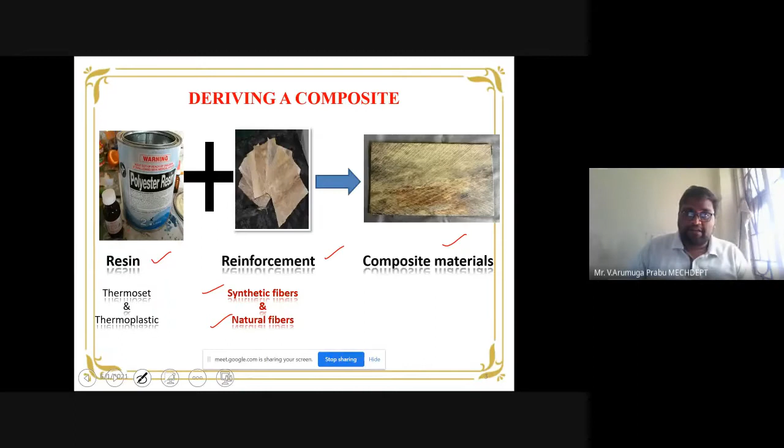So when we combine these two together, the output is your composite material, which should be in a plate form or whatever product form, according to the mold we are going to use and according to the application where we need it. So this is a brief introduction about how we derive composites.

Followed by that, the next one I would like to discuss with you is about hybrid composites. Why do we go for hybrid composites? We all know composite is one or more, in the sense matrix and reinforcement. Now as technology changes, as the day progresses, and as more research is evolving, the usage of hybrid composites comes into picture.

What are hybrid composites? Here you are going to use two or more reinforcements. Instead of one reinforcement and one matrix, we go for using two reinforcements. On the other hand, two matrices is not at all possible - there is not enough research because of its chemical properties. Two matrices is a difficult task.

But on the other hand, our research team focuses on mixing fillers with the matrix in such a way that we are able to produce hybrid composites. The reason is: one matrix is there, one filler is there, and another one is the reinforcement. So this is about your hybrid composites.

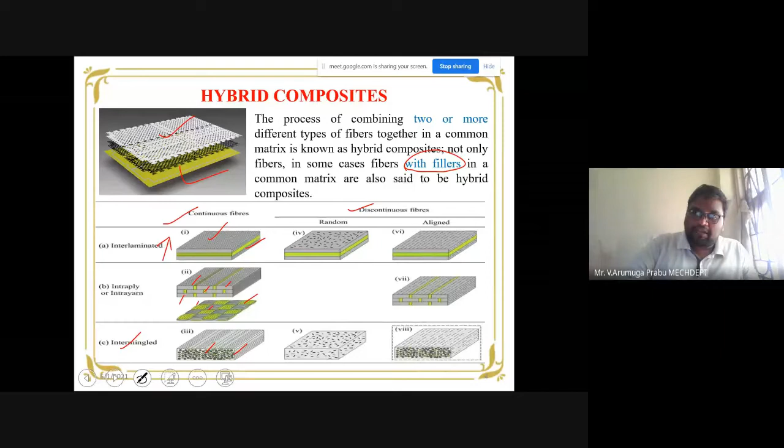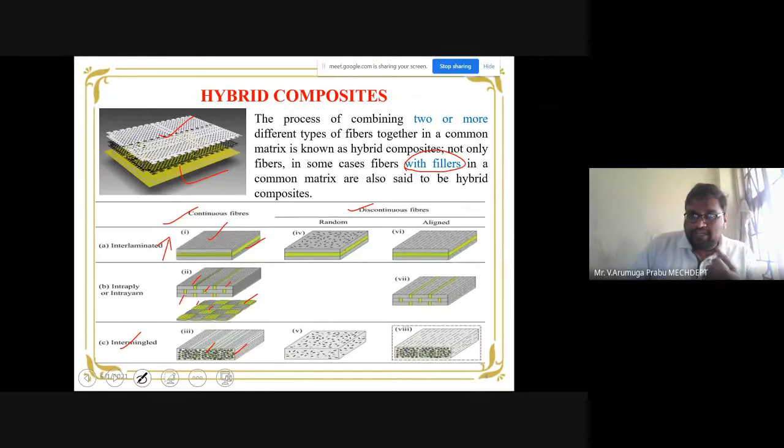In such a manner, the discontinuous fibers are arranged either in a random way or aligned way as shown in the pictures. So this is a brief introduction about hybrid composites, how we can prepare them in different arrangements, clearly shown in the pictures.

Now, why do we need hybrid composites? Of course this question will arise in all our minds. Automatically composites will reach the peak, and more sectors are using composites. Why specifically do we go for composites, and why do we go for fillers? It gives the answers for that too - why we go for using fillers for making some advanced, interesting composites.

The first reason is a general thing, that is the cost factor. High material cost is there. We go for merging one or more fiber, or fiber with filler, or matrix with filler. This automatically gives excellent output properties, enhancement in properties. So if you use filler as a material which is available by nature itself, there is no cost involved. Instead of spending a high material cost, with a very, very low cost, we are able to produce some good, interesting, advanced composites.

That's the first reason. The second reason is the low installation cost. There is no special setup you need to introduce for making your hybrid composites. So the installation is zero ultimately. That's another advantage where we go for the hybrid composite.

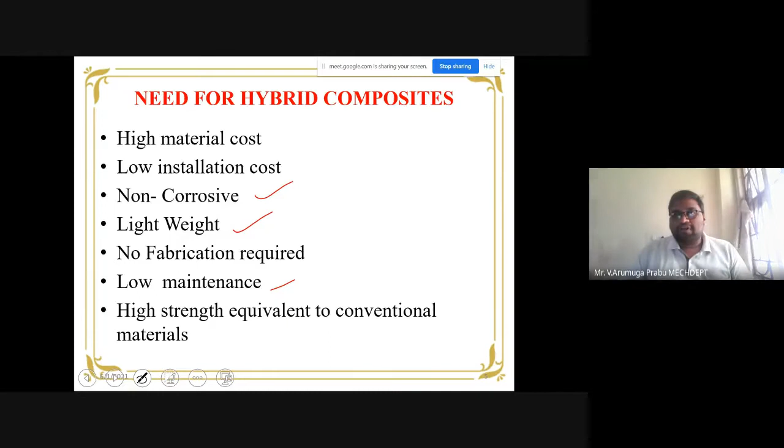And the ultimate highlighting point based on which we go for the hybrid composite is the high strength equivalent to our existing conventional materials. So these are all the major reasons based on which we go for the usage of hybrid composites.

Let me move on to the discussion about a few examples. In my next two slides, I'm going to show you a few interesting examples about the different reinforcement materials we are using and the different matrix materials we are using.

This photograph shows some interesting natural fibers as well as synthetic fiber used for developing advanced composites. The first one is the coconut tree - from the coconut tree, this is the coconut sheath that started from it. Then this one is the sisal fiber, purely a natural resource which is grown by itself. Nowadays homes also keep the sisal plant as a decorative one. The fiber extracted from the sisal plant is like this, just like our hair, with a pale brownish color.

Then this is one example of synthetic fiber, your glass fiber, which is in the mat form, and you can cut the mat and utilize it according to your need. So these are all a few examples of natural fibers and synthetic fibers which we are using effectively for producing advanced composites.

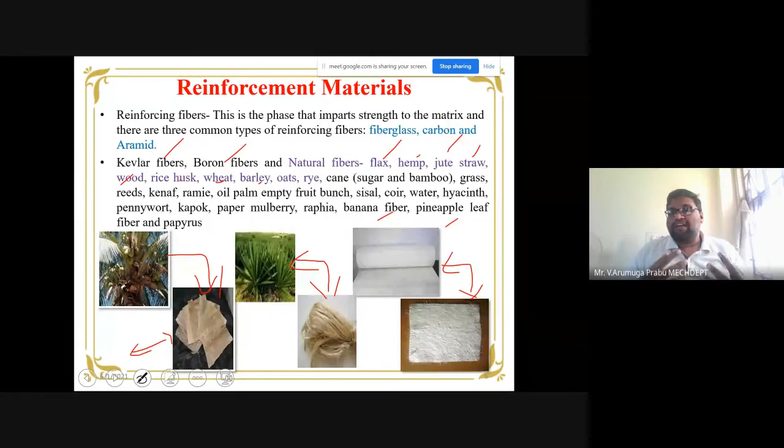Metal matrix is now being used exclusively for producing products related to aerospace sectors, where reinforcement and the matrix are both metal. But recently, they have started research studies on reinforcing natural fiber with metal. That research is recent, and some exhaustive research will be needed in the coming days.

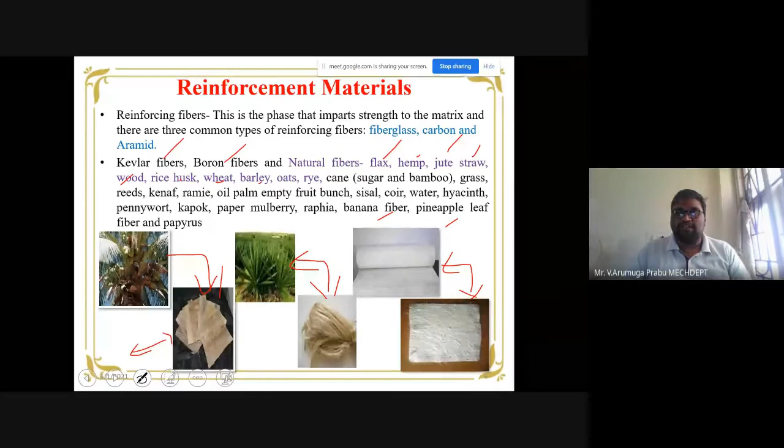So this is about the various reinforcement and matrix materials we use in manufacturing advanced composites. Now, the next thing I am going to focus on is the major fillers we use to produce our advanced composite materials.

These four are the major industrial wastes collected, which are ball milled, and the fine powder form is shown in the pictures. These four are the very commonly generated industrial wastes, more in number. Our team members did some extensive study on using these industrial wastes as fillers.

This rice husk is the waste produced during the processing of rice. And the fly ash, of course, you are all aware about. In all industries, while burning, fly ash is generated in larger number.

Then the third one is the red mud. This is an interesting waste. Myself and my professor Udaykumar completed one sponsored project based on this red mud utilization only. What is this red mud? It is an exclusive waste generated during the production of aluminium, coming out from the aluminium industry.

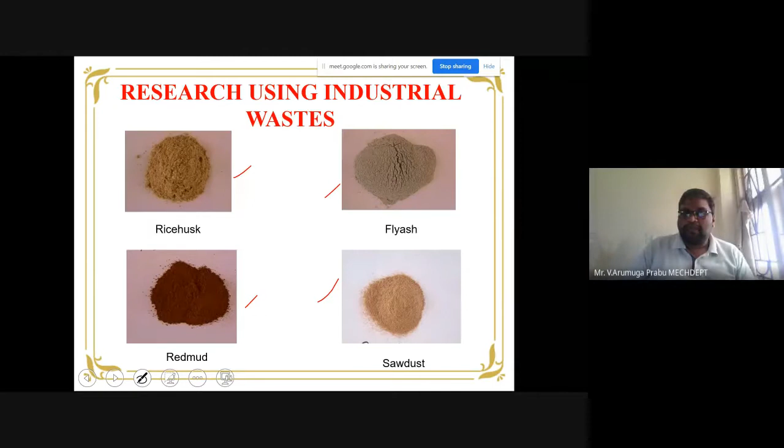So this waste we are using as a filler, that is, we are going to recycle it, and from this we are producing some innovative composites with excellent properties. Then finally sawdust, another waste generated during the processing of wood for making doors, windows, and other panels. So these four major wastes we take as filler, and some interesting results they produce during composite manufacturing, which I would like to discuss in my coming slides.

First, how we prepare the composite: we just take the polymer matrix, because this type of filler has the capability to bind only with the polymer matrix, not with metal or ceramic. You can try, because without trying we can't say anything. You can try in such a manner that your metal or ceramic should be in powder form, as shown in my previous slide, all in fine powder form. You have to collectively mix it together and go for some advanced powder metallurgy technology, which I am not familiar with. If you are familiar in that area, you can try that also.

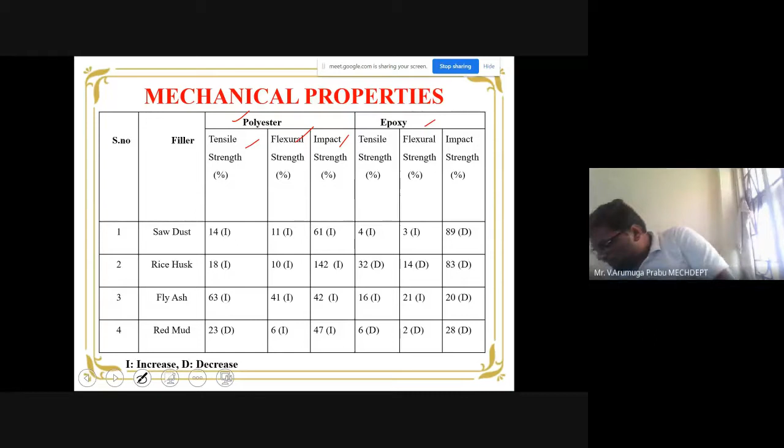As mechanical engineering background people, we carry out mechanical property studies, mainly tensile strength, flexural strength, and impact strength. We take two polymer families to see how these fillers are behaving. Both belong to the polymer family. In that polymer family, two types we have considered: one is polyester, another is epoxies.

So now here, the interesting results that we obtain is tabulated here. The I indicates the increase, and all the values are in terms of percentage, the increase and the decrease in strength.

Now, note that in the case of sawdust waste, both polyester and epoxy show a considerable increase in all the strength except one particular case. In all other cases, 14% increase, 11% increase, 61% increase. In the case of polyester, all show the increasing trend. If you see overall, collectively all four wastes, you are able to notice only increases. In this particular case, only decrease.

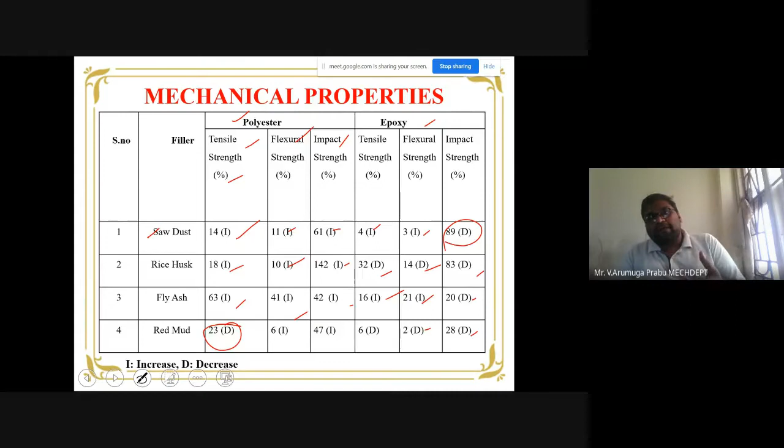Probably they don't have enough capability to withstand the pulling force. On the other hand, in epoxy also, most cases show increase, but decrease will be high. So this waste is not at all compatible with epoxy, because we notice a drastic decrease in the mechanical properties, exclusively tensile, flexural, and impact property. So when compared to polyester, epoxy is not well compatible with the industrial waste fillers.

On the other hand, polyester poses increase in all the strength. In fly ash, rice husk, and sawdust, all three show increase in weight percentage in all three cases, that is tensile, flexural, as well as impact. Only in the case of red mud, we noticed a decrease.

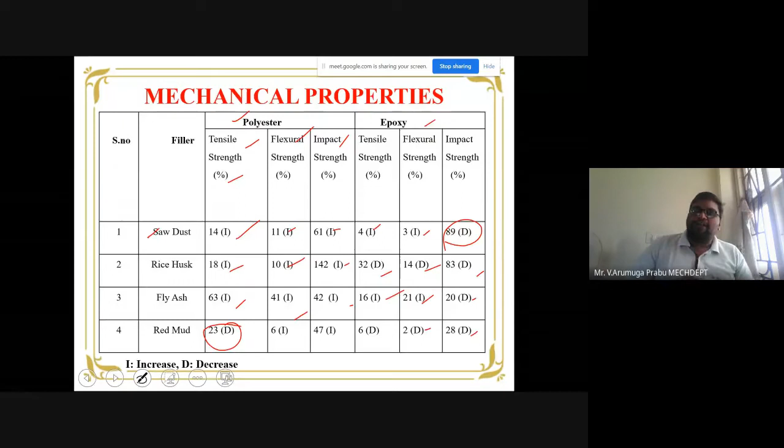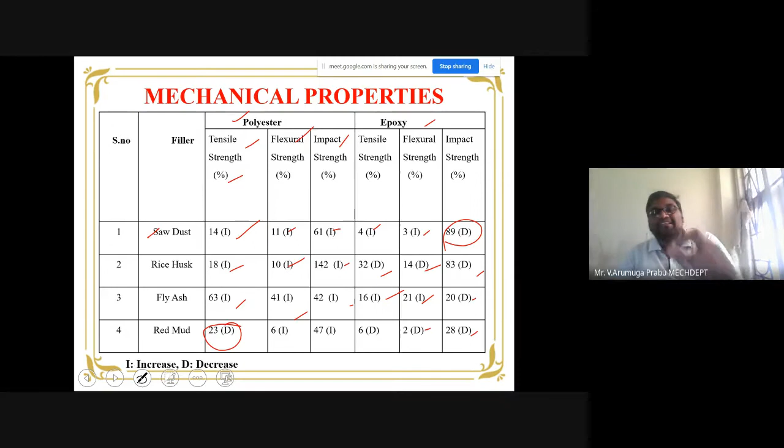That also we noticed in red mud, the non-uniform distribution of these fillers will produce a decrease in the tensile strength, because the fillers accumulate at one particular place. Here your filler is the reinforcement. During my earlier slide presentation, I pointed out that the reinforcement's main purpose is to give additional strength to your matrix. So if the filler occupies one particular position, your matrix simply remains in one area.

So now your matrix does not get strengthened. That thing happens because of the non-uniform distribution, which results in the decrease we noticed in that particular case. Other than that, we are able to notice an interesting increase in the strength.

So now these results I am showing are purely for your filler and matrix, that is, the filler is the reinforcement and the matrix is your polyester and epoxy matrix.

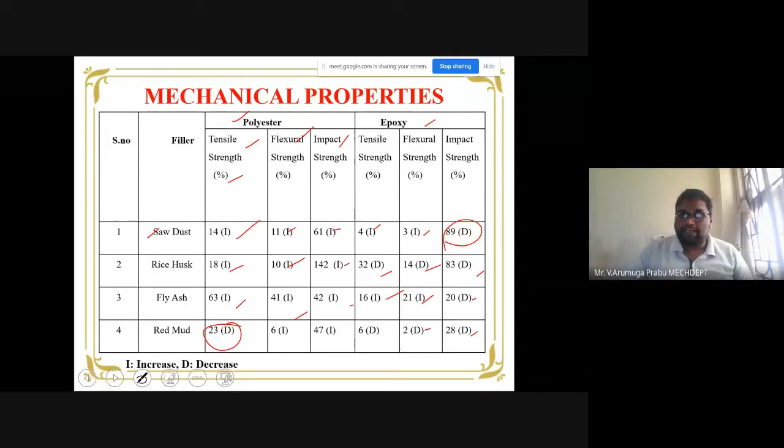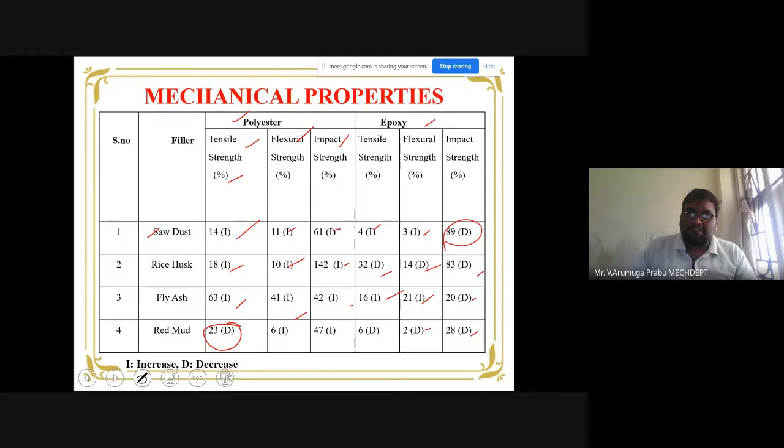Now with this, let me move on to the discussion about the case studies. A few examples I am going to take, showing how the advanced composites are manufactured and how they behave with respect to the usage of fillers, especially the industrial waste fillers. So let me show you case study 1, about the hybrid composites prepared purely using natural fibers.

The results I am showing in my case study are for the combination of two natural fibers. This is natural fiber 1, Palmyra waste. The next natural fiber is coir. So now this Palmyra waste and coir are going to be combined together and reinforced with unsaturated polyester resin in such a way that the hybrid composite is produced.

So here also we note some interesting change in the mechanical property, that is in the tensile strength, flexural strength, and the impact strength. This two waste combination, and another main thing we have to notice when preparing the advanced composite is the composite weight percentage, not the composites, the reinforcement and the matrix. The reinforcement-matrix weight percentage and the reinforcement length, all those things we have to consider.

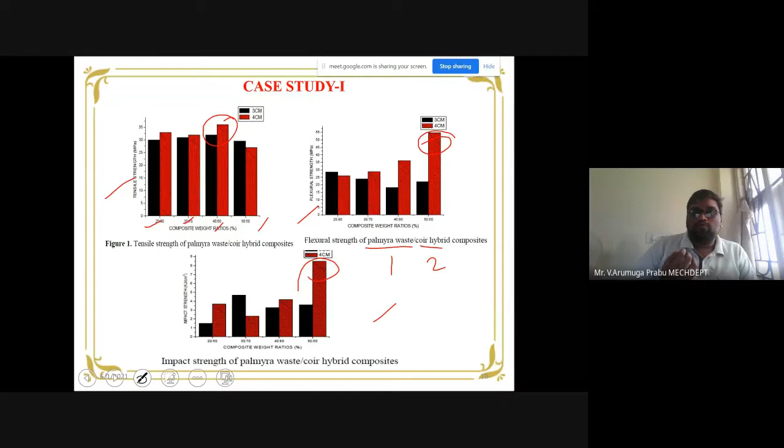Okay, so flexural and impact at 50:50 weight percentage shows enhancement in results. On the other hand, for tensile strength, 50:50 comes last; only 40:60 has the highest value. This may be due to the incorporation of Palmyra waste and coir in such a way that we are not able to obtain the final product in a properly uniform manner, affecting strength. So this is one case study.

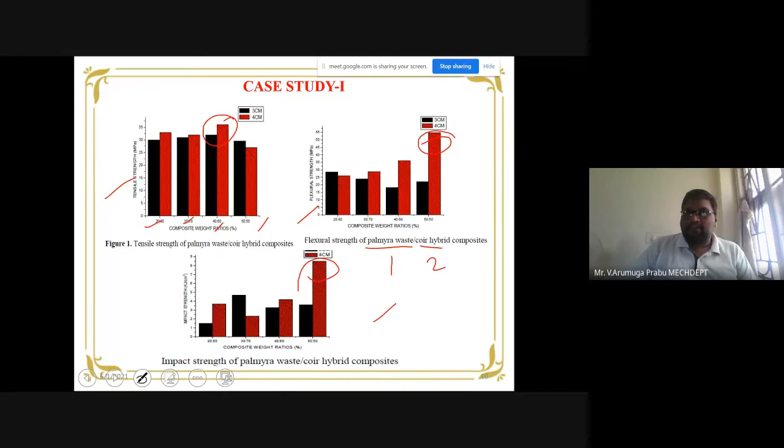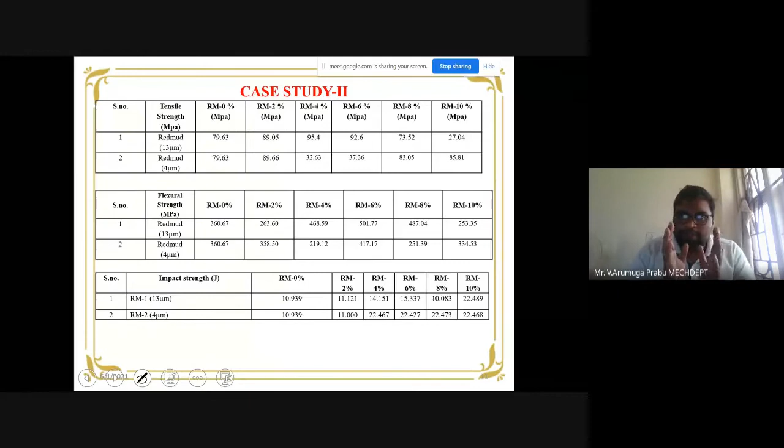And this is the next case study. What we did here is add a filler along with the fiber and matrix, so case 2 is another type of hybrid composite we prepared. My case 1 was purely the preparation of hybrid composites based on two natural fibers.

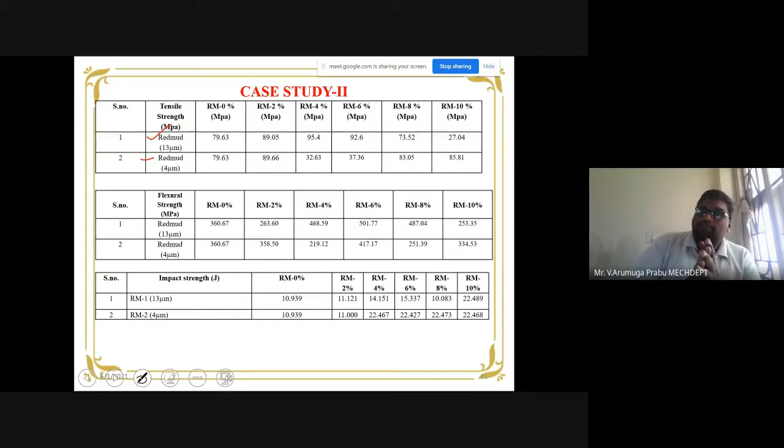Here in case study 2, I discuss the behavior of hybrid composites prepared using fiber, then filler. The filler is the industrial waste red mud, as mentioned in the table. Followed by that, the matrix is unsaturated polyester. Here we vary the weight percentage of the industrial waste red mud filler from 2 to 10 only.

Why is such a low weight percentage selected? The reason is that during our initial studies and iterations, we noticed that higher addition of weight percentage decreases the strength. So we turned our research focus towards developing advanced composites using a low red mud weight percentage that varies from 2 to 10.

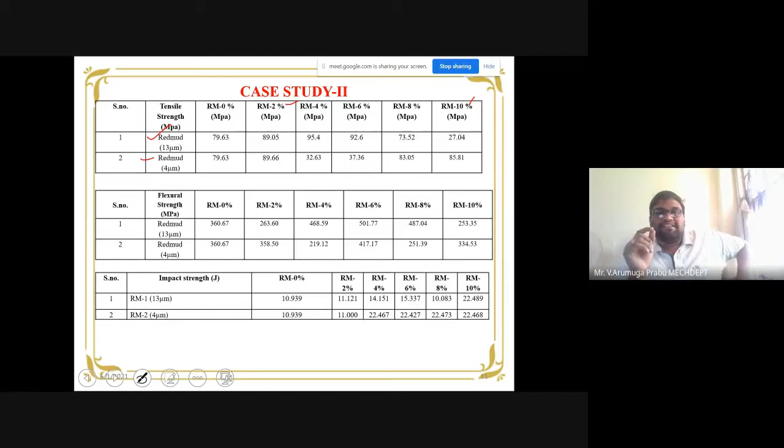That is the reason why nowadays nanocomposites are creating a huge impact, because the particle size is in nanometers or microns, giving better surface dispersion. If surface dispersion is greater, we automatically obtain finer results. This is evident from many researchers' work, and because of this reason, we chose this small particle size range that I'd like to highlight here.

Notice the strength values. This is the case without filler, where the percentage is 0, and the strength is 79.63. If you look at the other cases, an increase in strength is noted, except for red mud 8 and 10. So an increase in weight percentage beyond a point decreases the strength, which is why we chose the range between 2 and 10.

Among the combinations, the 4% weight percentage gives better results for the red mud particle size of 13 microns. So varying the filler particle size also creates a huge impact on strength. At a 4-micron particle size, it gives the highest strength of 89, for the 2% case only. For the remaining percentages, strength decreases, then slightly increases again for 8 and 10%.

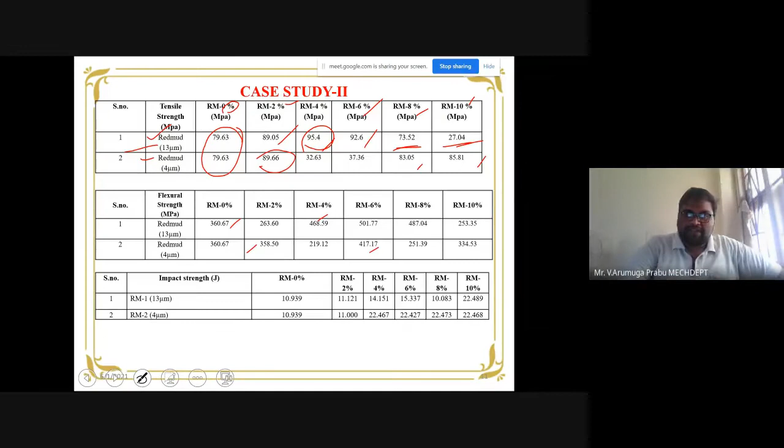The reason may be due to the dispersion behavior of the red mud. The flexural strength also behaves in a similar manner, and the impact strength results are also shown in the table. From these results, I would like to conclude and insist strongly that the addition of red mud filler along with the natural fiber and polyester resin increases the mechanical properties — that is, an increase in tensile strength, flexural strength and impact strength.

Just to illustrate this, I'll take one example and change the color to green. Now please note the green color marking. In this case, 92 is the highest among all; in the next case, 501.77 is the highest; in this case, nearly 22 is the highest. You can take any case — this is almost always the highest one.

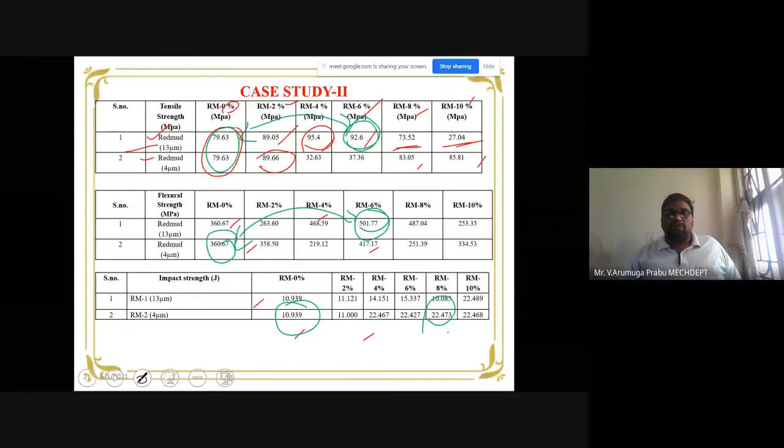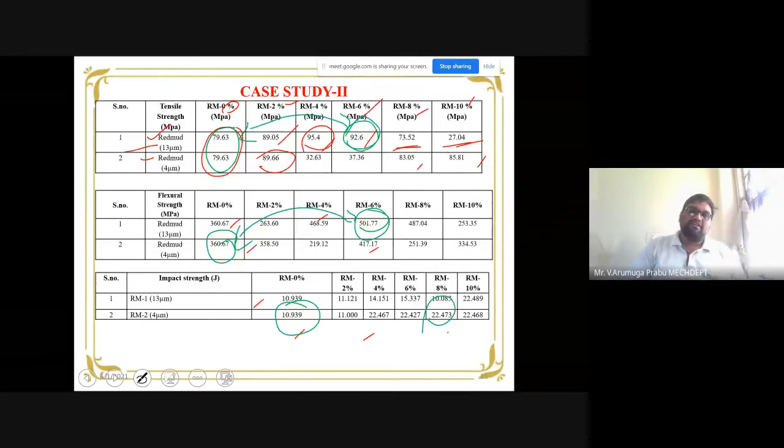If you compare to the 0% case across all instances, you'll see a much better improvement in strength. The 0% case represents only the fiber and matrix combination results. On the other hand, when we include the filler as a secondary reinforcement to produce hybrid composites, enhancement of strength is noticed in all cases — tensile, flexural, and impact properties.

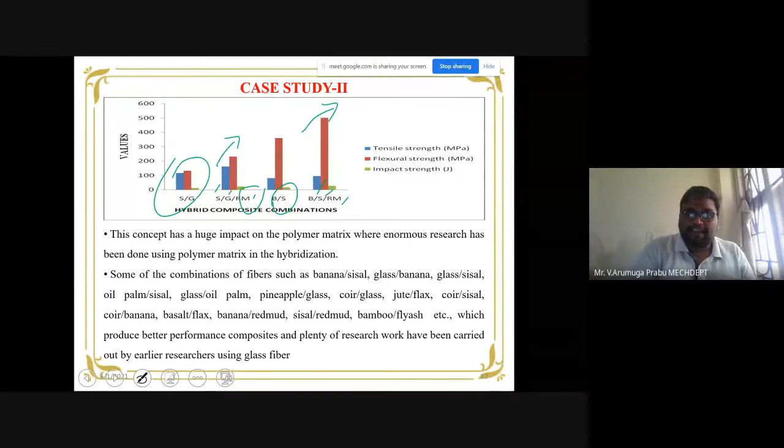Now you notice the peak. Please notice this color. These three colors will go in an increasing trend in case of addition of filler. So in all cases, interestingly, the increase in mechanical property values is clearly identified.

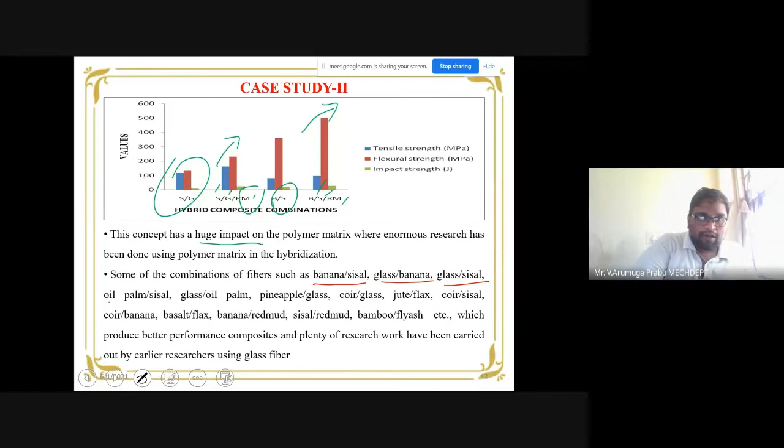This concept is going to produce a huge impact in the case of polymer matrix, where enormous, exhaustive research is done using polymer matrix in hybridizations. You can select any combination, as mentioned in the slide: banana-sisal, glass-sisal, glass-banana, oil palm-sisal. These are some interesting combinations: pineapple-glass, coir-glass, jute-flax, sisal-red mud, bamboo-fly ash. Likewise, all these hybrid composites are produced, which give better performance composites, and a lot of work has already been reported by many researchers, especially for the hybrid concept using glass fiber, that I would like to highlight.

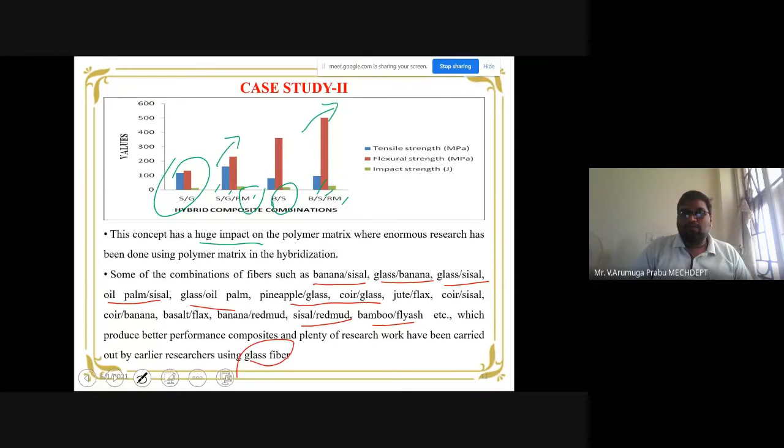With this, I am concluding the first part of my presentation, and as I pointed out in the beginning slide, let me move on to the discussion about the last half. The second half of my presentation is about another interesting type of filler, that is biochar.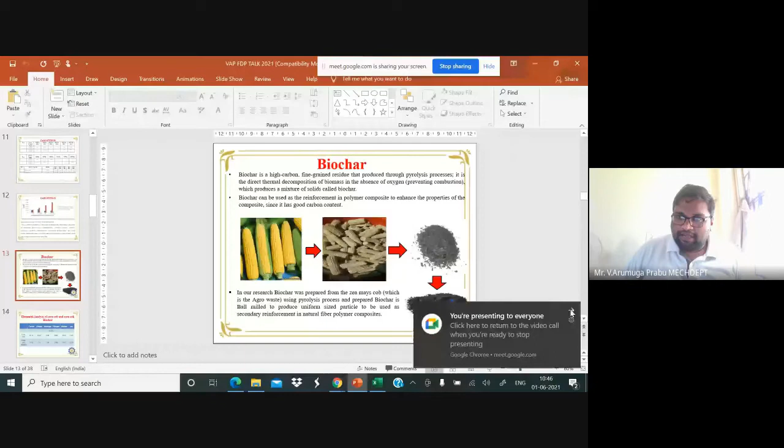Okay, let me continue my second half of the talk. Later on we will have the discussion. I will take another 20 to 25 minutes for the discussion of my second half, followed by that we have...

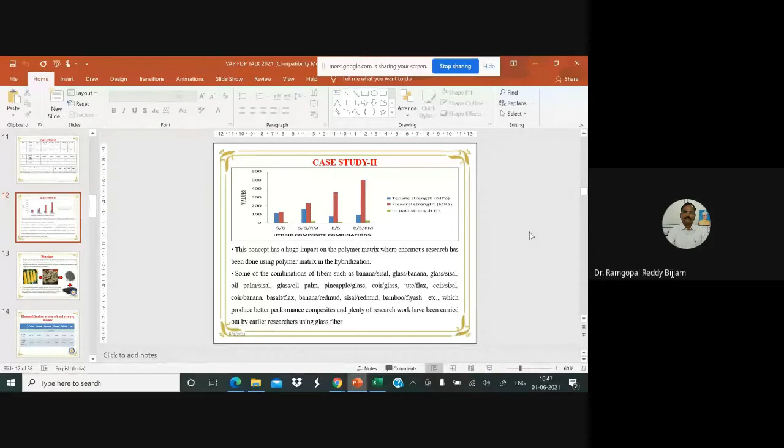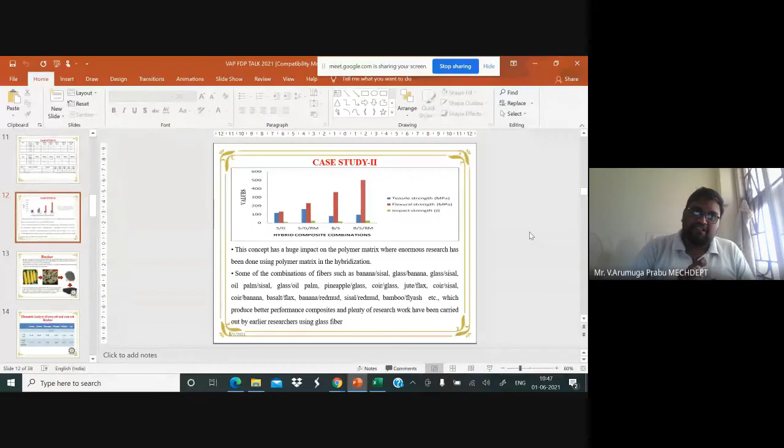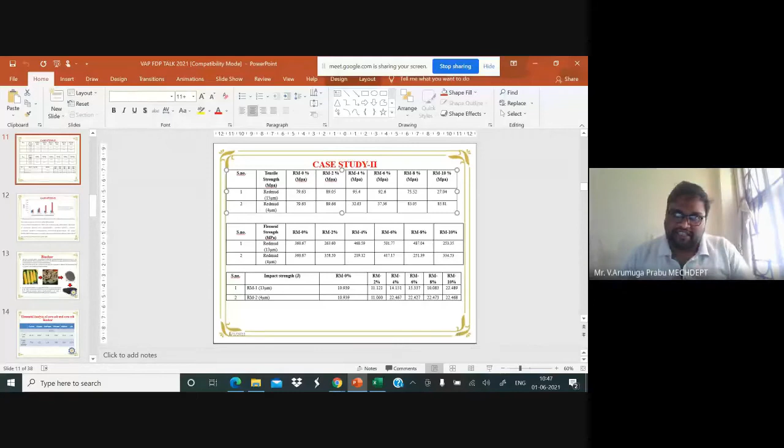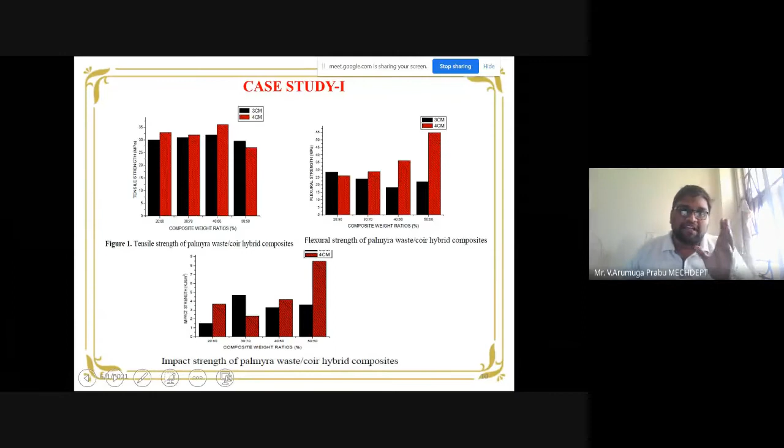Yes sir, when you are taking different combinations, jute, sisal, and so on, what is the volume fraction of each fiber you are taking? Is any one constant, or are you taking different volume fractions for all these combinations? If you are varying two fibers in hybrid reinforcement simultaneously, which one affects the strength, and due to which fiber are you getting more strength? How can you say?

Yeah sir, that's another good point. I would like to insist here that for the main reason, initially we take, for example, sisal as 30%, then banana fiber as the remaining 70%, a 30:70 ratio. In that 30:70, we study the mechanical properties for this combination. We keep this 30:70 fixed, and then we add the filler reinforcement along with that. So we have comparison values based on pure sisal and pure banana results. Based on these results only, we are able to compare. Apart from that, as you pointed out, we are not able to identify, if we vary that combination, which one is exclusively affecting the properties.

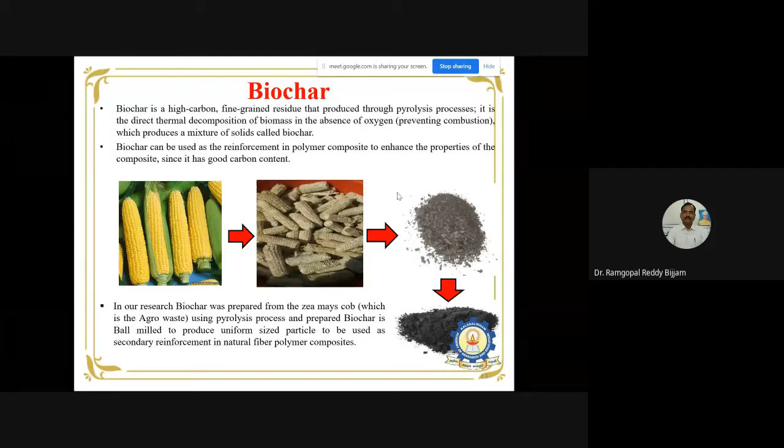Sir, one more doubt. When you are using red mud, what happens is the tensile strength increases up to about 4-6%, but if you increase it further, the tensile strength decreases. Why does this happen? Is there any reason for this decrease?

Yes sir, the main reason relates to the manufacturing technique we followed, which is the solution dispersion method for preparing the red mud-based polymer composite. In this technique, similar to the hand layup method, I pour my polymer—either polyester or epoxy—into a glass mold, add the red mud in powder form into the matrix, and perform manual stirring.

So the reason is due to these manufacturing techniques. Because of manual stirring, proper distribution of red mud is not achieved, and also since I am manually pouring into the glass mold, the red mud tends to accumulate in particular places and occupy the corners. This is one of the major reasons we identified for the variation in strength.

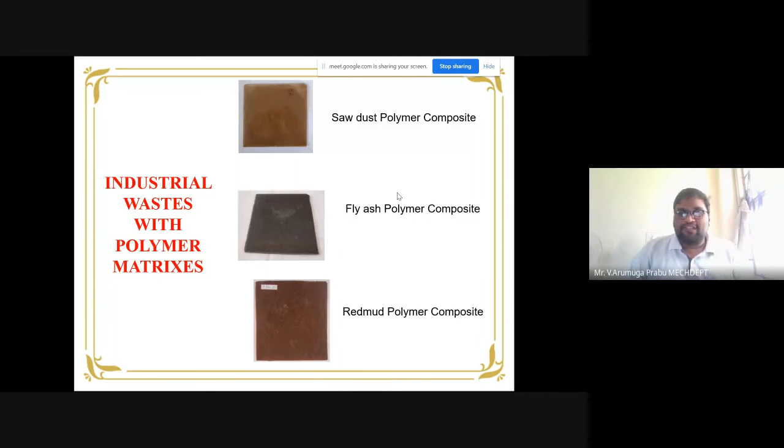This one is about biochar, an interesting type of filler we have been working on more recently—for the past 2 to 3 years, my research team has been doing research in this area. What is biochar? It is also prepared from waste, obtained when waste is subjected to the pyrolysis process. During pyrolysis, thermal decomposition of biomass occurs in the absence of oxygen.

You put the waste inside a container, and the waste is subjected to burning in such a way that absence of oxygen is ensured. The biochar produced has an excellent capability—it has good carbon content, and this presence of carbon enhances the properties of composites drastically, especially along with polymer matrices.

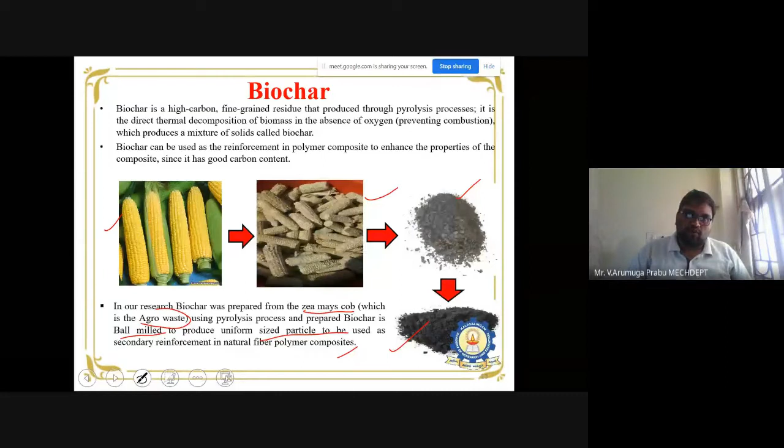This biochar is ball milled to produce uniform sized particles, which will again be used as a filler, as a secondary reinforcement along with natural fiber for producing the advanced composite. So quickly I will go through my slide.

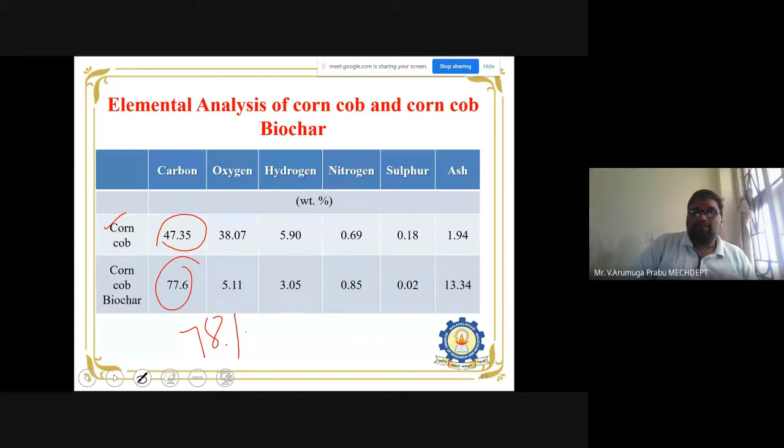This is the elemental analysis showing the composition present in the biochar. The ordinary waste corn cob has a carbon percentage of 47, whereas the biochar obtained from these corn cobs by means of the pyrolysis process has a very high carbon content of nearly 78%, which makes this corn cob biochar an effective reinforcement for advanced composites, because carbon is one of the highest strength elements. High carbon content surely produces the highest strength.

So this is how we are producing the biochar. The source is corn waste, and the pyrolysis temperature normally varies from 500 to 700, though you can also take 300, depending on your waste material. This 700 is suitable for corn cob, but in some cases 700 will not produce biochar, so depending on the material, the temperature will vary from 300 to 700.

The duration of burning is normally 3 hours in a closed confined environment with complete absence of oxygen. After the content is obtained, it is subjected to ball milling, normally in the ratio of 1:15, to obtain a smooth fine powder form. The ball mill speed and duration also vary depending on your material.

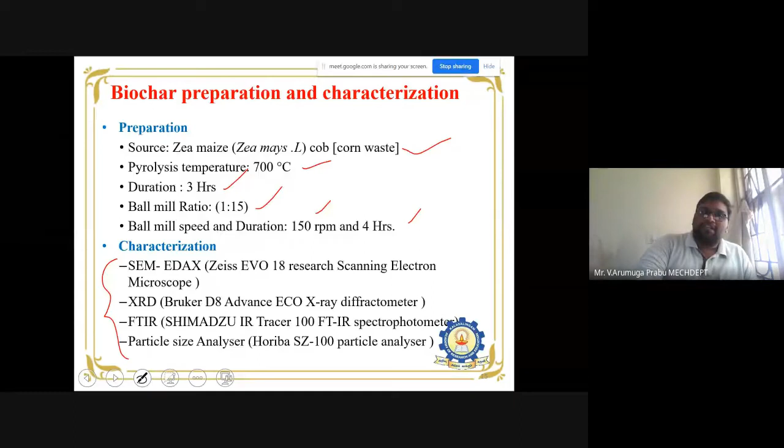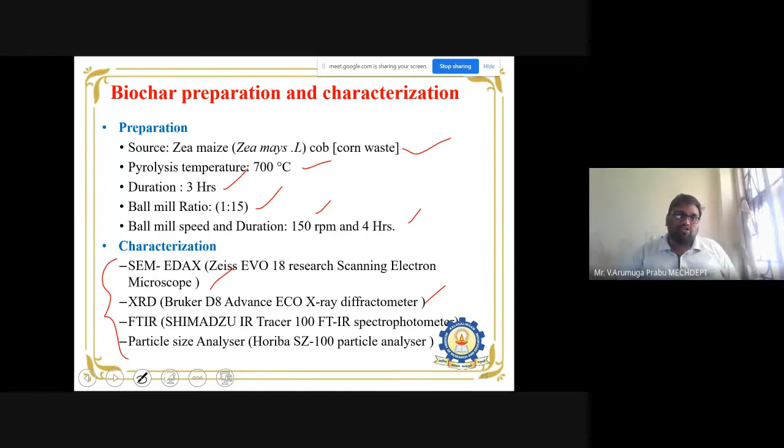After the biochar is prepared, it is subjected to various characterization studies to understand the composition elements present in it. For that, you can go for SEM, EDAX, XRD, FTIR studies, as well as particle size analyzer to know how much size your biochar is. All these things you are able to understand by means of this characterization study.

So this diagram shows how we are preparing, extracting the biochar. The first one is the matrix, which is as usual the polyester matrix. Then the reinforcement is your biochar - see here, this black one is none other than your biochar. And this is your solution dispersion method, which was pointed out a few minutes back.

This is a glass mold, covered on all sides except the top. Through the top opening, the mixing of matrix and reinforcement is poured over the glass mold, and the glass mold is left for curing. The final specimen obtained is in a rectangular or square form depending on the size of the glass mold.

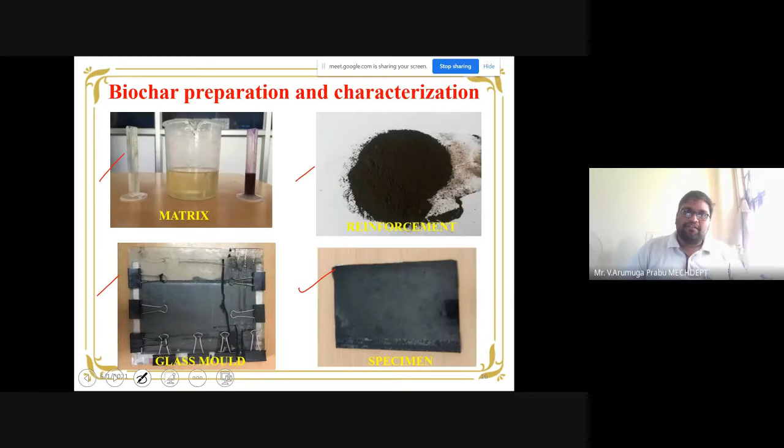Then for further studies, you have to cut this specimen as per the ASTM standard to carry out the various mechanical performance studies, as well as physical property and chemical property studies. See, composite is a very vast field, a very vast interdisciplinary approach, so you are able to use it in an effective manner.

And these are all the results which we obtain by the usage of biochar. So here, instead of polyester as shown in the previous diagram, the results we did using another interesting type of polymer, the pure vinyl ester resin, as the matrix, and here biochar is used. Note the difference here - this is pure vinyl ester.

Pure V is the pure vinyl ester resin. So when compared to pure vinyl ester, the addition of biochar produces an enhancement in results at the 6 weight percentage. All other remaining weight percentages show a decrease in strength. If you notice the 6 weight percentage in all cases, the enhancement in strength is noticed. So among all the combinations, the 6 weight percentage biochar possesses excellent mechanical properties when compared with pure vinyl ester.

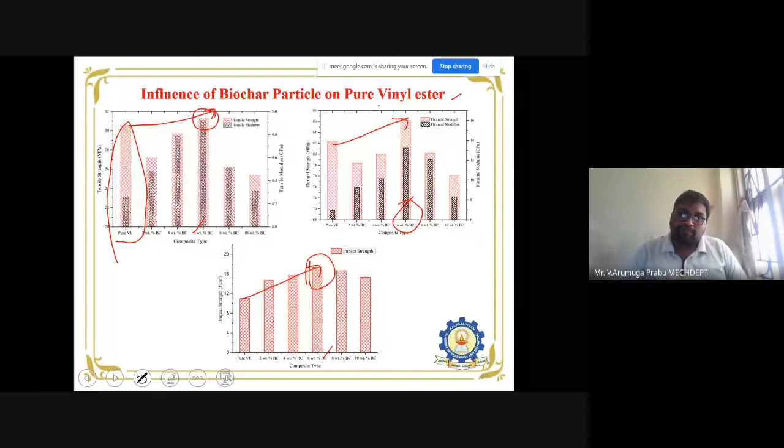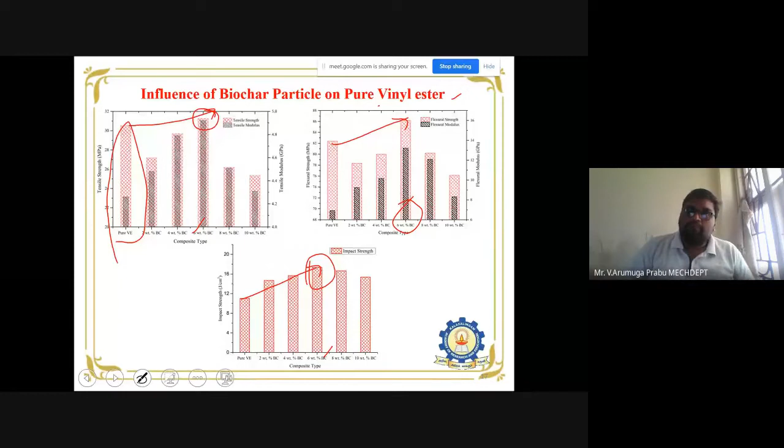So this is the proper example for a composite. You must ensure that when matrix and reinforcement combine together, it produces increasing strength at one point - then only it's said to be a composite, producing some improvement in results. When combining these two together always produces a decrease in strength, there's no use saying that one is an effective composite.

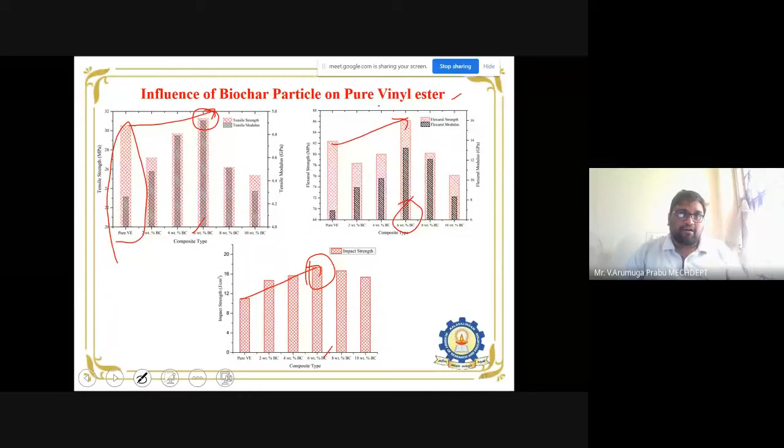So these are all the results. Then followed by this, we obtained interesting results using vinyl ester and biochar alone. Now we go for mixing the biochar along with - to see how it's going to behave with the natural fiber.

So here the natural fiber we have chosen is the Sansevieria cylindrica fiber, and some of the special properties of this natural fiber are mentioned here. It has a high strength to weight ratio, high creep resistant capability, high tensile strength, and very good toughness. It has very high wear resistance, higher than metals, and good corrosion resistance. It's not affected by temperature change, because most natural fibers are subjected to deformation due to temperature change, but that's not the case with Sansevieria cylindrica. So this is the comparison of how Sansevieria cylindrica possesses good properties, and how its composition compares well with other natural fibers like sisal.

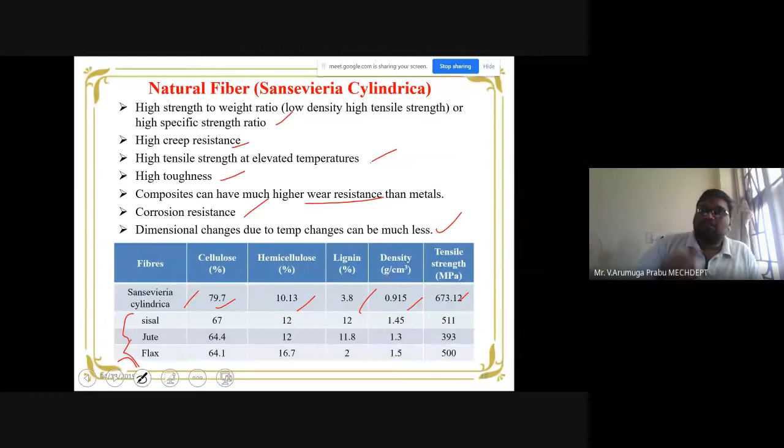Sansevieria cylindrica is also used as a decorative plant. Now I will quickly go through this to clarify what composition is present.

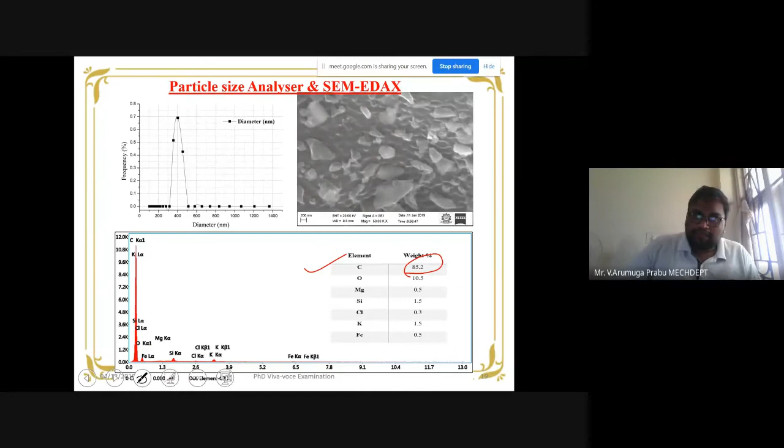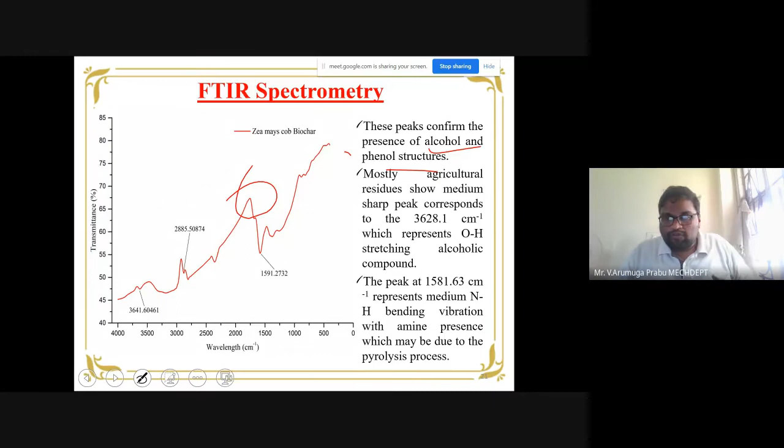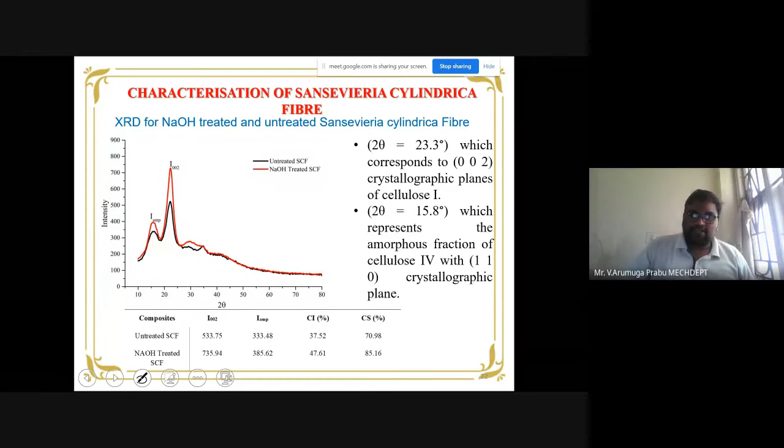This is the characterization done for the Sansevieria cylindrica, and we also carried out fiber treatment, which other expert members will share in later sessions, so I don't want to spend more time on these characterization treatments. This is the XRD for the treated fiber, NaOH and silane treated fiber.

Let me explore my discussion further on the mechanical properties of the biochar filled Sansevieria cylindrica composite. As we discussed in our earlier presentation, here also the 6 weight percentage composites show interesting results. The results are very high in the case of the 6 weight percentage biochar added Sansevieria fiber composites, which contain natural fiber. At 0%, without biochar addition, only Sansevieria fiber and the vinyl ester, the strength is nearly 45 megapascal.

On the other hand, with the addition of biochar, especially 6%, you see how much it increased the tensile strength - it touches nearly 75. That much high strength the addition of biochar yields. On the other hand, at higher weight percentage, the strength gets decreased, which is evident from the graph shown here. Now this is about the tensile behavior, how biochar behaves regarding tensile strength.

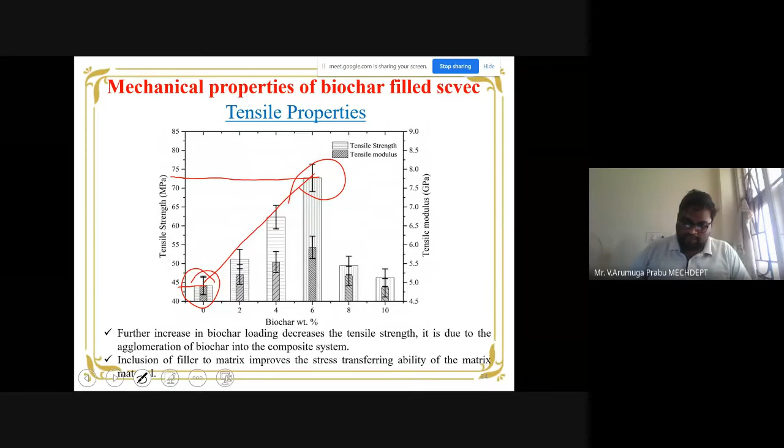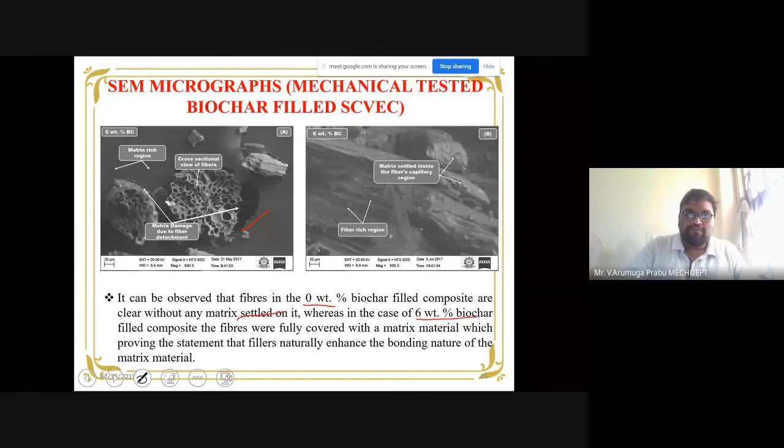Now let me move on to the discussion about the flexural behavior. This is the supporting evidence for how the strength is improved and decreased. With the help of some characterization studies, I am able to monitor and represent in detail at which weight percentage the strength is increasing. The first image shows the 0 weight percentage biochar, where no matrix settling is evident. On the other hand, at 6 weight percentage biochar, the fibers are fully covered with the matrix material, so the fillers are held strongly, giving good bonding. Because of this good bonding, the strength ultimately gets improved a lot.

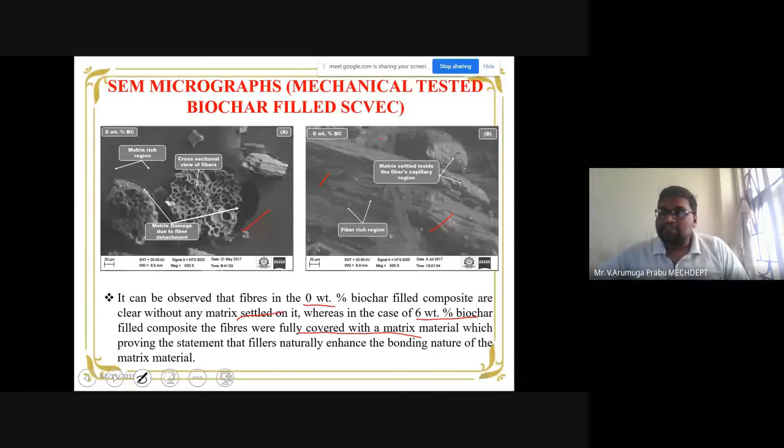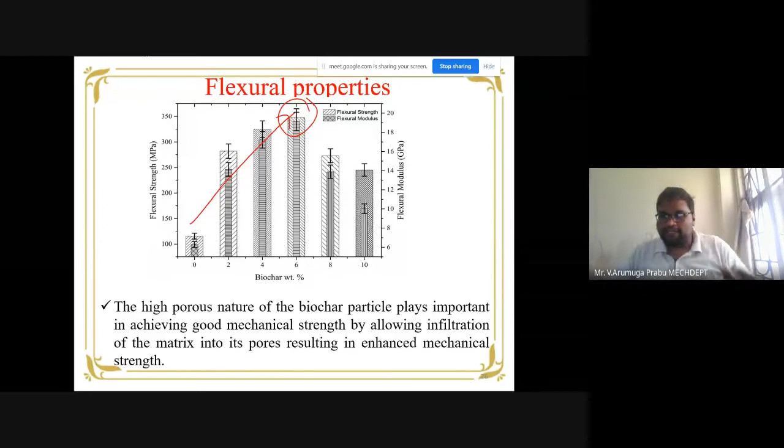In the flexural test also, the same thing - see the increase again at 6 weight percentage addition of biochar. The good mechanical strength is obtained because of the high porous nature of the biochar, which is another important speciality of biochar, and it plays a vital role in achieving good mechanical strength. In this way we are able to attain enhanced mechanical strength in all cases - that's one thing I would like to highlight regarding the flexural properties. Followed by that, again some images are shown here, this is the 6 weight percentage addition of biochar.

See, this same image I am going to take for the fractured specimen, and notice the fractured portion alone, how the fracture takes place. So by means of doing some extensive microscopy studies at the fractured surface, I am able to notice whether my matrix gets debonded or fractured, whether my fiber gets fractured, whether my filler gets collapsed. Everything we are able to notice clearly, exclusively with the help of scanning electron microscopic studies.

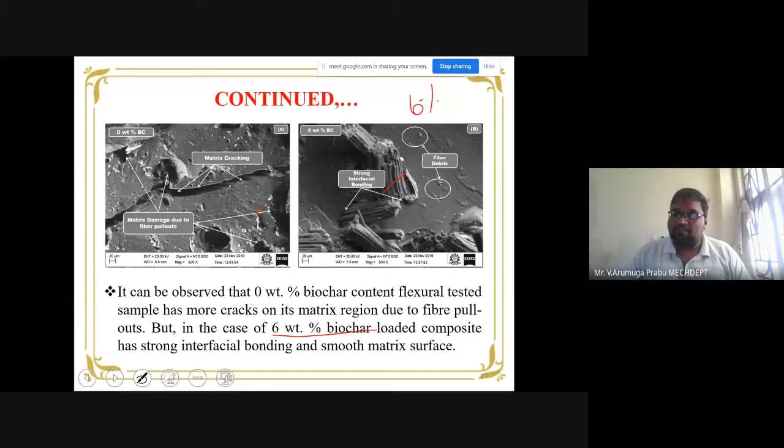So in these scanning electron microscopy studies, I am able to notice that 6 weight percentage biochar has a strong interfacial bonding between the matrix and the filler, which automatically holds the fiber strongly in such a way that the fracture and failure get avoided, which is evident from the same image.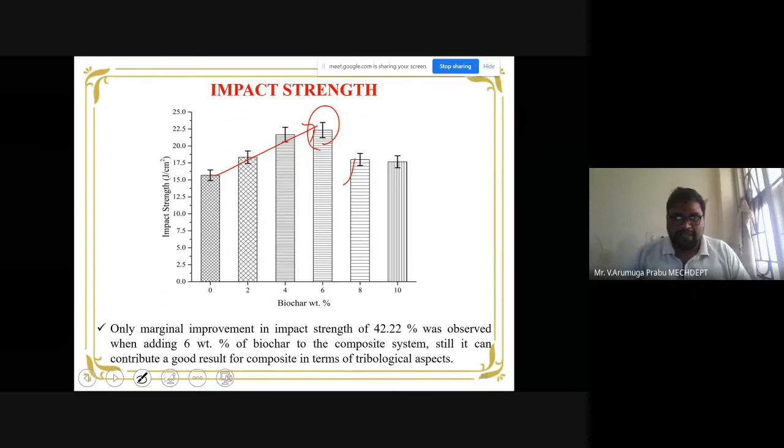Again, in the same case, the 6 weight percentage shows the impact strength touching the peak, an increase of about 42% higher than the one without biochar. With that, the mechanical properties section is over — how the mechanical performance is improved a lot by using biochar filler along with natural fibers for producing advanced composites. In the same way, another 2-3 properties I'm going to highlight quickly.

The first one is about the erosive behavior. This is one interesting property that recent studies on composites are focusing on — the erosive performance of polymer matrix composites. The erosion studies are carried out using a special setup called the erosion test rig setup, and the 3 variables which we can vary to study composite performance are the filler content, the impact velocity, and the impingement angle.

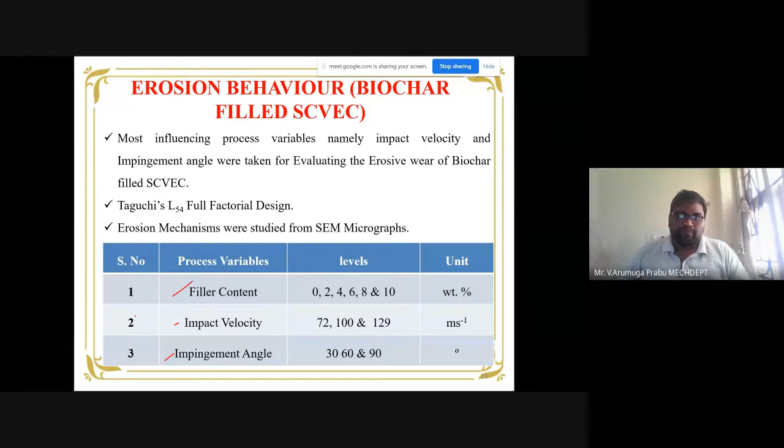Now, these are all the variations. So here also we are able to notice that by varying the biochar weight percentage from 2 to 10, with the increase in weight percentage, the erosion resistance is very, very high. That's ultimately evident from the graphs.

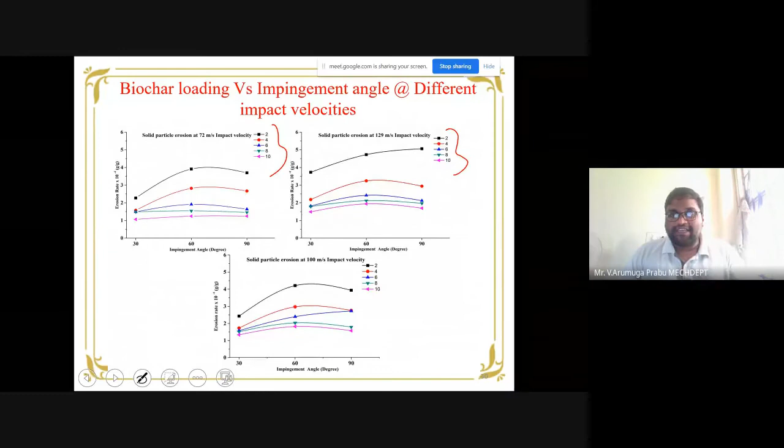That's why, unlike the graph I pointed out to you earlier, here it is not the 6 weight percentage — here it is the 10 weight percentage. Because of going to a higher weight percentage, the erosion resistance is also high. So here it's for the 10 weight percentage biochar.

The next property which we study for the biochar-based Sansevieria cylindrica composites is the water absorption test. Moisture absorption studies are carried out with a main focus on understanding the moisture resistant capability of the developed composites, and the moisture resistance is evident from simple calculations based on finding the diffusion and permeability coefficient. How am I ensuring this?

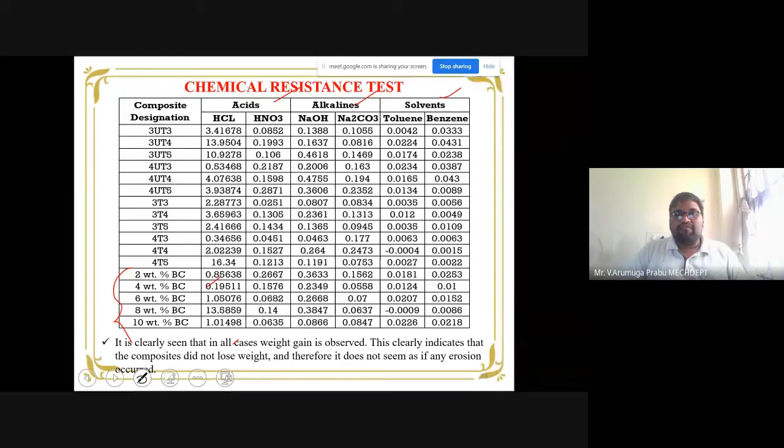Interestingly, we note that the addition of biochar based composites shows a weight gain in all cases, meaning it has the capability to absorb the chemical. A weight gain is noted in all cases, which clearly indicates that the composite is not going to lose any weight, like the situation in our erosion studies. The composite does not lose weight, which shows an interesting phenomenon.

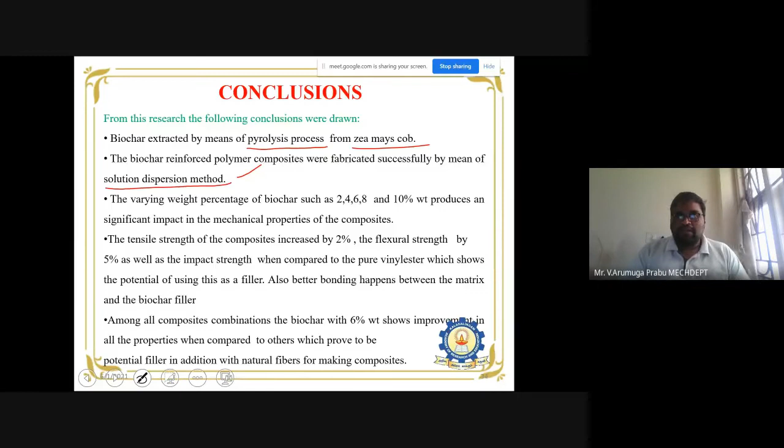Let me move on to summarize what I discussed about biochar as well as my starting discussion. I start my summary with the recent topic: biochar. Biochar is extracted purely by the pyrolysis process, and the example shown here is extraction from maize cob. It is manufactured successfully by the solution dispersion method I pointed out, and the weight percentage taken varies from 2 to 10%.

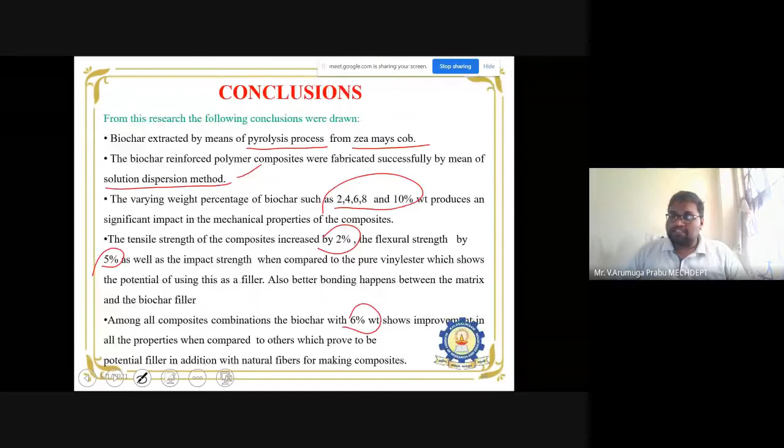The interesting thing we noticed, as pointed out earlier, is an increase in tensile strength by 2% and flexural strength by 5% when compared with pure vinyl ester. Among all the composite combinations prepared, exclusively the 6% weight addition of biochar shows excellent results, proving to be a potential filler in addition with other natural fibers for making advanced composites.

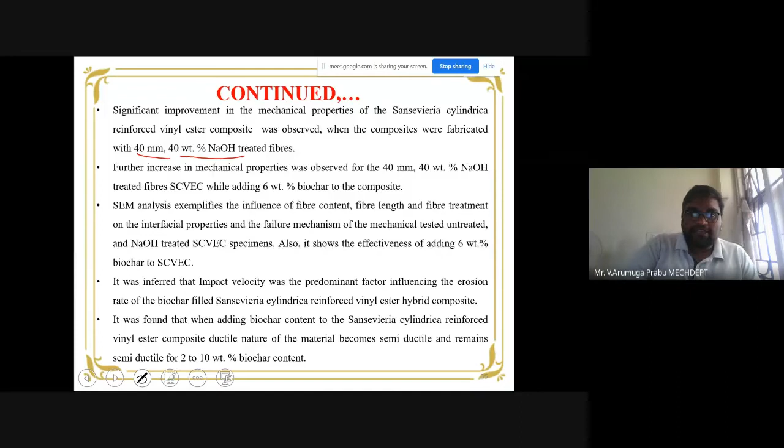The next point I'd like to highlight is regarding improvement. When we use biochar in natural fiber, the best enhancement in strength noted is for 40mm, 40% NaOH treated fibers. In this case, 6 weight percentage of biochar along with 40mm, 40% treatment possesses better mechanical properties, where the influence of fiber content, fiber length, and fiber treatment on properties was also analyzed in detail.

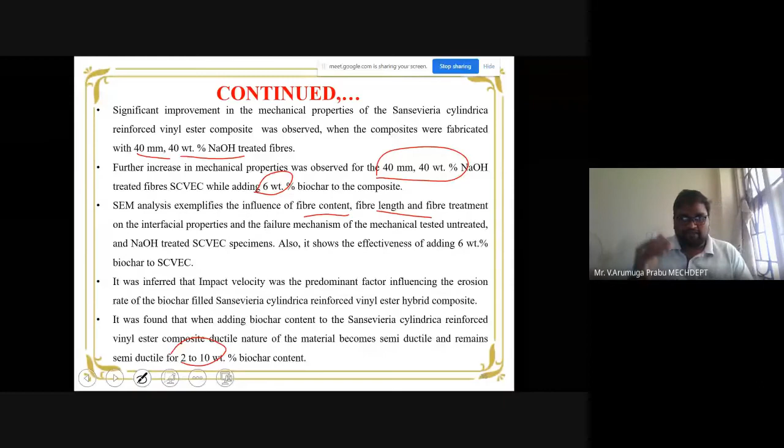Also, as highlighted earlier, the erosion behavior changes from ductile to semi-ductile by the addition of 2 to 10 weight percentage, and this is about erosion resistance, which is 68%. With the help of scanning electron microscopic studies, we are able to justify the improvement in strength.

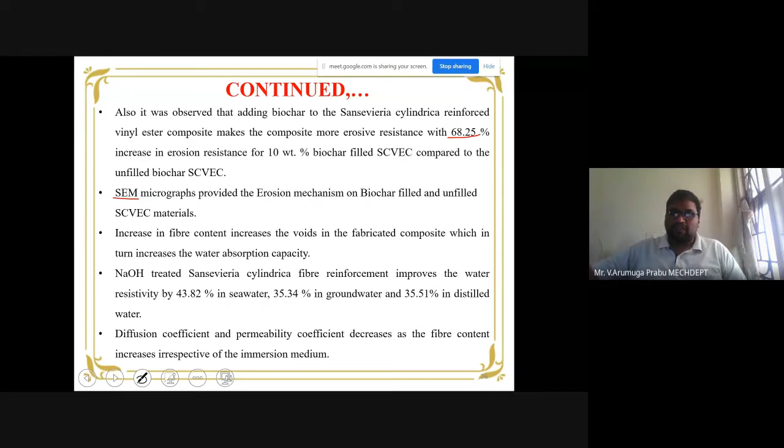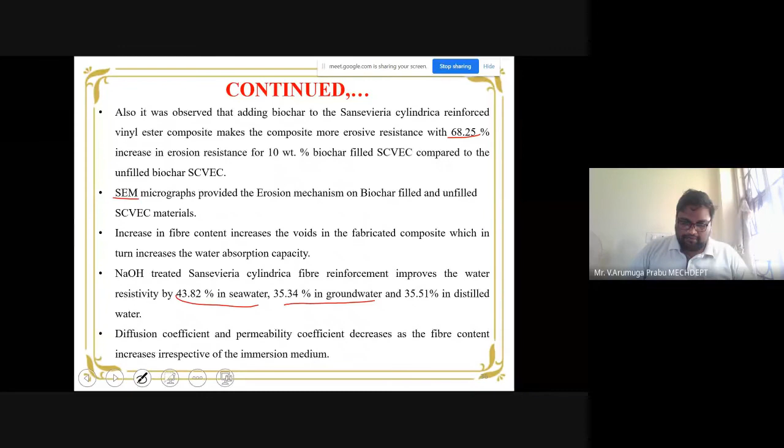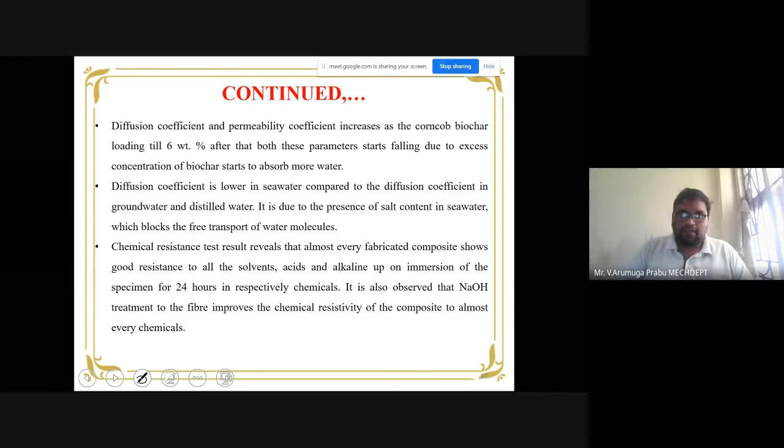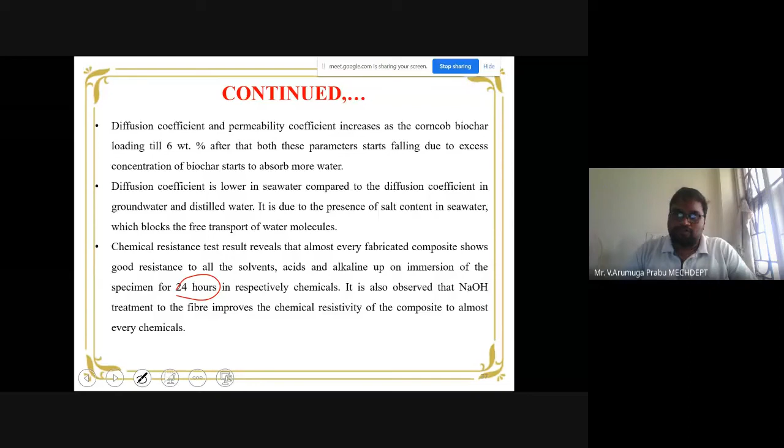With this, let me conclude today's talk about the importance of fillers in advanced composite manufacturing, and now let me clarify questions from your side.